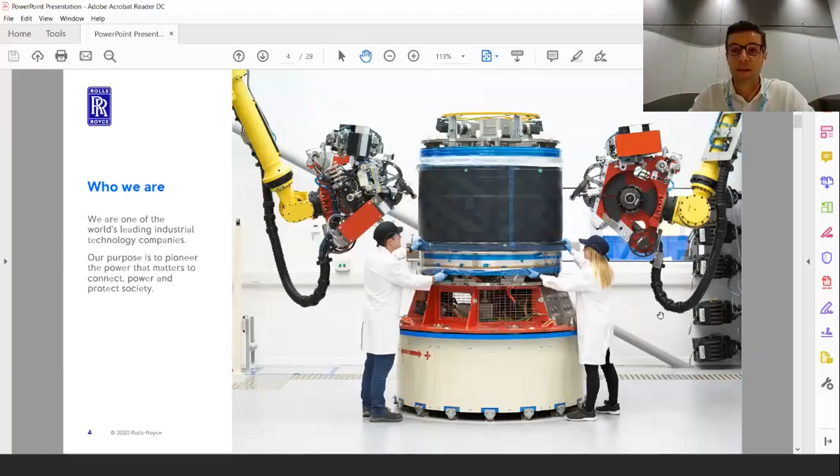That's not actually in Singapore, but you would have read in the news that we're also considering small modular reactor, and that's something that we're pushing quite hard now. So that's our transition to the power that matters to us, green power and sustainable power.

As I said, electrification is becoming very important. Quite a few programs are running. We've partnered also with a few other industries. We've also bought Siemens eAircraft.

It's very important for us that we transition towards sustainable power, potentially hydrogen flight. So we're also exploring fuel cells.

As it stands, the business is... most of our resources are still in civil.

That's probably the Rolls-Royce power systems that people know the most, so civil large engines. But we do have quite a lot of marine application in power systems, and I say marine because that's the biggest. But we also power trains.

We power quite a few things with traditional engines, reciprocating engines, as you see in the picture there, under the brand of MTU, which you might recognize. That's also part of Rolls-Royce.

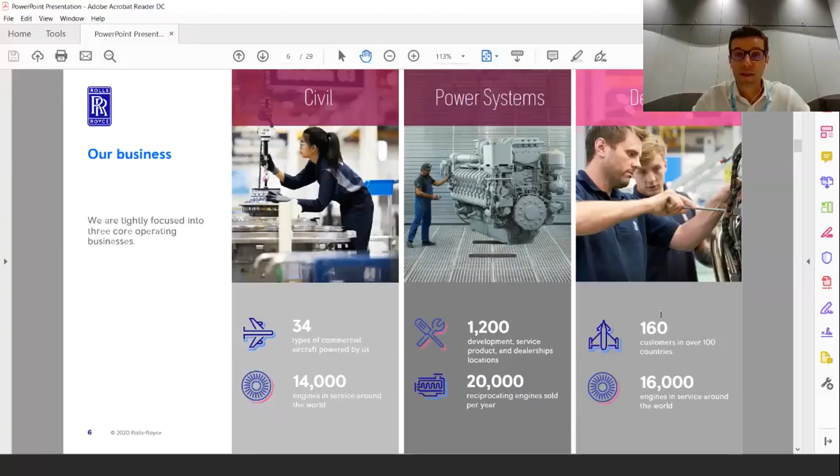Now I'll move to the manufacturing technologies. The challenge we have is that we need to be working on what we will do in the future, especially in my division. I'm the corporate lab director and chief of manufacturing. I'll take you through this presentation to explain what that means.

Early TRL level, technology readiness level, technologies are developed in our UTCs, University Technology Centers. I'm responsible for that in the Asia Pacific region. Then we use technology centers, which I'll touch on later, to mature that technology developed within universities into an environment close to a shop floor.

And then we push it into our plants, mainly in Singapore but also elsewhere. So the technologies we develop here can first be implemented in Singapore, but then also in Germany, the US, or Egypt.

So just as background, we are going a lot more into digital. That's something we've done historically - gathering data from our engines. We're actually very familiar with data analysis and trend monitoring, gathering data to be more informed of the situation. That's been going on in our operations center in Derby, UK, for a long time. Now we're trying to apply this to pretty much everything, including manufacturing.

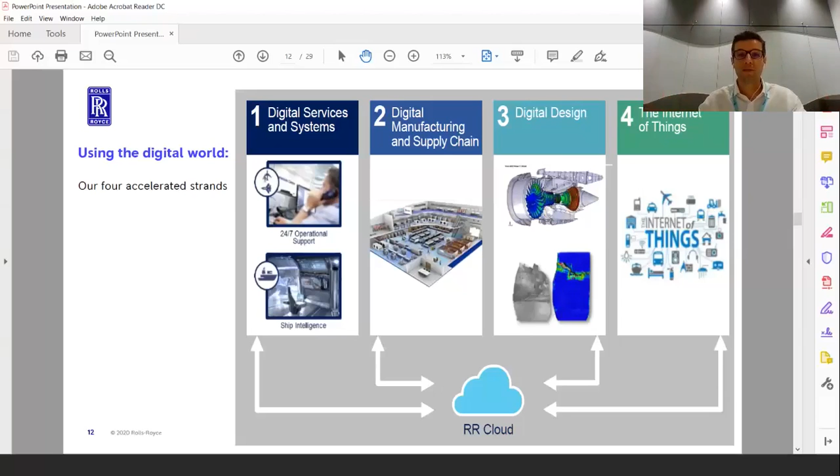So we've started to do that - IoT developments. We've got digital in service, which already exists, but now we've got most of our tools being tracked into the shop, and we've worked with SIA here in Singapore, for instance, on tooling. This is becoming very helpful because we can build that into the MRO planning.

So we know that we've got the tools available, we know the engines are there, we know all the C checks can be done properly when the aircraft comes in. That's what we've tried to do, taking advantage of the downturn, unfortunately, with the COVID impact. We tried to set up all these things in anger so that when the load comes back, we're a lot more established.

So we're trying to take advantage, to an extent, of the fact that the load went down to build in additional things or implement things that we were struggling to find time to do. So that's what we've been concentrating on - all these tags, the new apps to actually do the tracking. All this has been developed in the last few months.

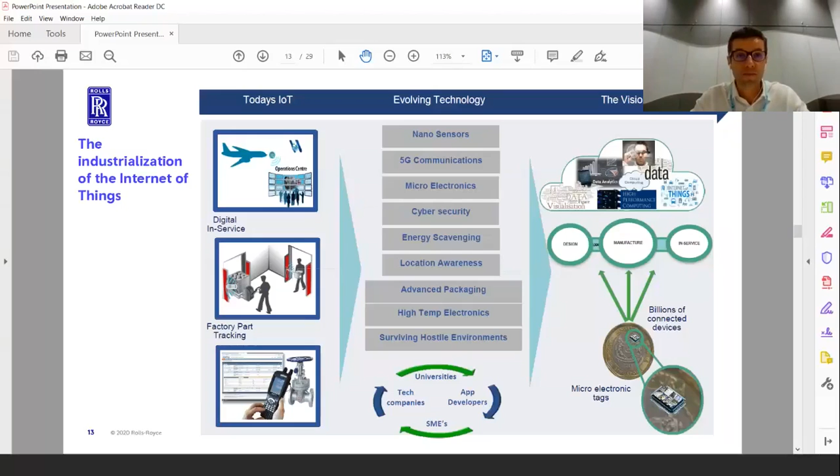So we've done that also on machines - that's an example of implementation. So in our fan blade manufacturing plant, we've now installed quite a few additional sensors, and we're able to stream in real time the key process variables, and very quickly we can see.

So now, because we've done that for a few months, we know what a good blade looks like, and we know exactly the pattern that the key process variable should follow instantly. That's what's quite encouraging actually - when something goes wrong, it goes wrong very quickly. It's actually very rare that the process starts very well and then goes off or goes wrong. It actually starts within minutes.

So as soon as we see - and there is quite a significant difference from what we've seen so far, which is also good - instantly you can stop the process and check what's going wrong, and obviously save your part and ensure that there is no non-conformance. So with that pilot, we're now implementing it onto our other machines.

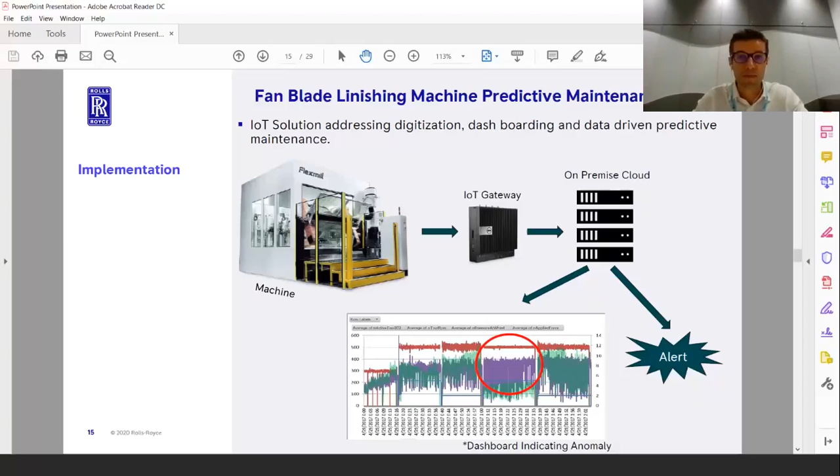Once you've downloaded the data, you need to use quite a bit of artificial intelligence, especially for inspection. So if you think about what I just mentioned, you've got your infrastructure in place, you collect the data, you will decide on your sampling rate, you will decide on the platform that you want to use, you will decide where you do your analysis.

Do you do it at the edge, which is close to the machine, or do you do it on the cloud? Obviously if you do it on the cloud, you benefit from quite a lot of apps or additional analytics power to an extent that you don't have to develop yourself. However, cybersecurity is a bit of a challenge, so you need to ensure that you can actually push all your data to the cloud without any risk. That's an assessment that every company needs to do.

Historically, Rolls-Royce is very conservative, but I can see that with how cybersecurity is evolving, we're actually now more confident that we can push more data to the cloud. So just a few examples there of the AI solutions that we've developed.

We can have a look at the microstructure to detect the alpha case in the fan blade, for instance, if there is any. We can correlate X-ray sentencing to a location later on in the process. So that's what's also very important - once you start to download all the data, you can actually correlate different process steps. So again, a lot more informed manufacturing.

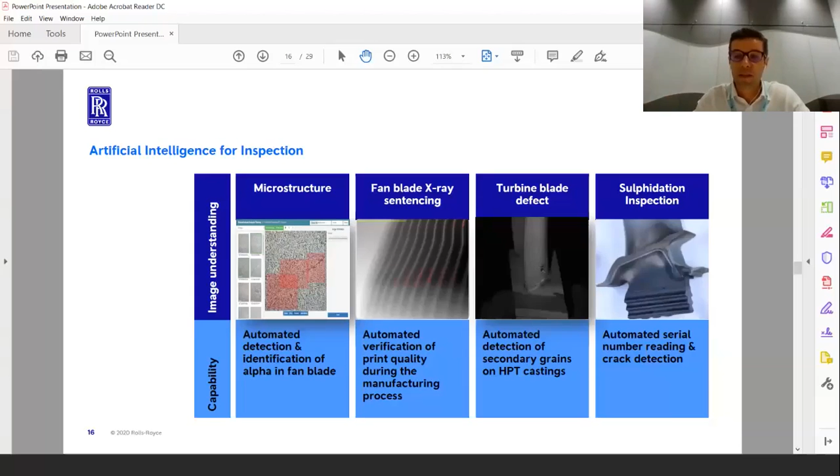And we can also do in-service inspections, so sulfidations, checking that there isn't any damage in the blade. So that's for our MRO shop before we actually fit it back on the engine. We can also use that for in-service support.

So we can monitor the SFC, the fuel efficiency of our engine in service. We can predict, or we can do in-service analysis. If there is any LRU, line replaceable unit, that should be replaced, we can also do that based on the data. Any compressor blade issue, for instance, we can also determine based on the image analysis whether we can go for an additional set of cycles or not.

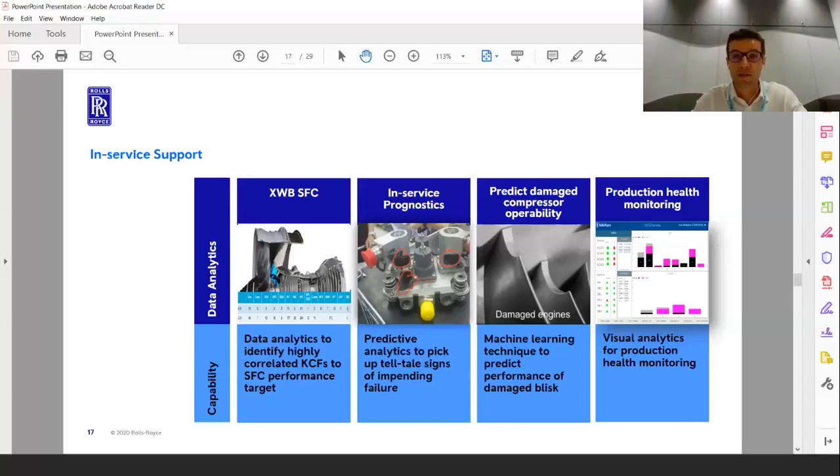So all this is very important, but you do need to ensure that you've got the capability to download your data and you've got the right infrastructure. So to do that, we've actually used a public-private partnership in Singapore.

It's a collaborative approach with our research center. What we need to realize is that the chart I've presented on the architecture - you've got your gateway, and then from the gateway you go to the cloud. Sounds very easy, very straightforward. It's actually quite complex. You've got greenfield machines or brownfield machines.

The new machines are enabled with communication protocols that make it a lot easier. But you can't have only new machines. In fact, most of our plants are a few years old, at least. So we need to be able to connect all these machines as well.

Some solutions, you think, well, I'll just go with one brand, for instance, and that should make it easier. That's not true either. Systems with the same brand on them - we've had instances where it doesn't connect effectively. So a lot of people will be selling that Industry 4.0 solution saying it's already been done.

I think it's still pretty challenging for quite a few people, and therefore we have to try things. My belief is that you have to do pilots. You have to test things in a real shop floor environment. However, you cannot do that if you have to disturb your production setup.

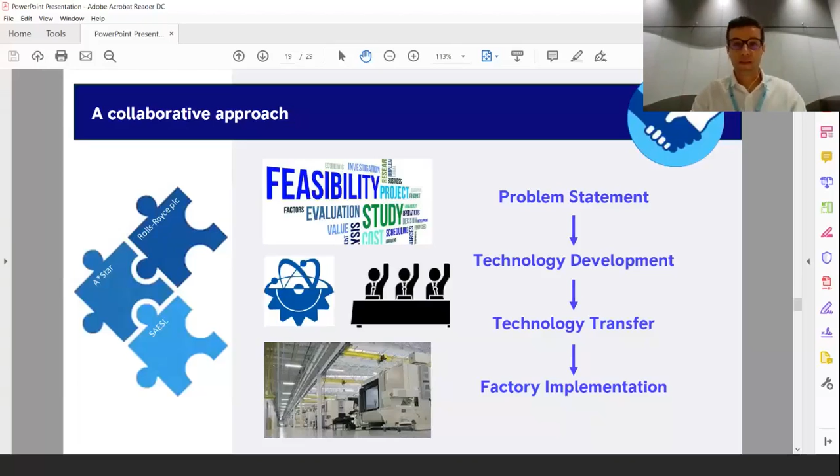Once it reaches a sort of lab level, that's TRL3. On a representative component, still in a lab, that's TRL4. Once we get to that point, then we push it into our research centers - in this instance, that's where I'm calling from actually today, the A-STAR Research Center. That's where we test all the solutions in representative shop floors. We debug basically everything, ensure that it can be sustainable.

And then we push the solutions into our facilities as soon as it goes into 7 onwards. So 5 and 6 is pre-production, you could say, and then 7 onwards is actually in production.

So a few last words on the lab. We've got a lot of researchers, as I said, more than 100. That's the phase of the corporate lab that we're running. We've developed significant technologies, and some of the IoT solutions presented - self-powered sensors and all these sort of things - all this has been developed in NTU.

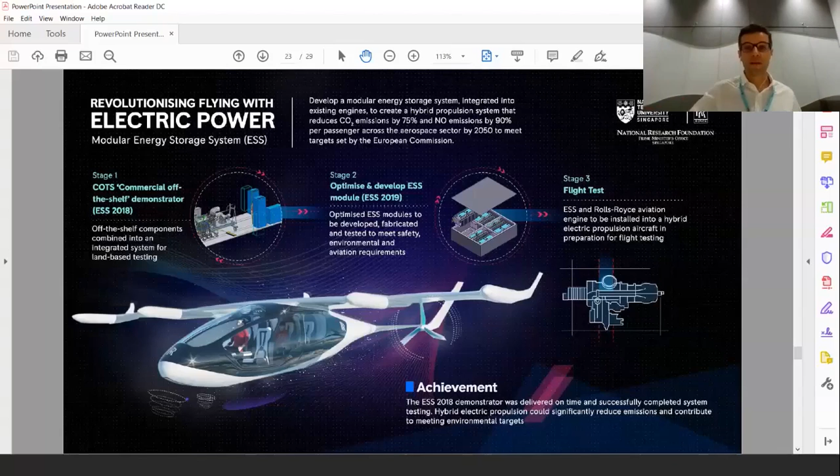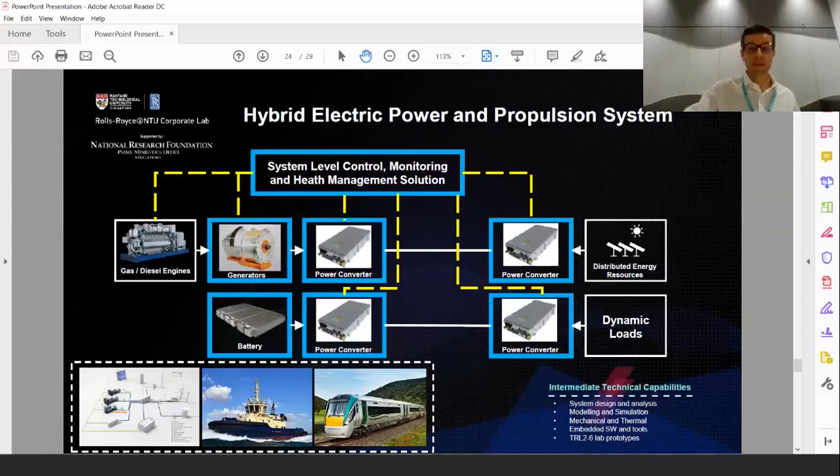So when you've developed the fundamentals of the technology, we then push it into our advanced remanufacturing centers. Now it's a lot more industrial - we've got robots, 5-axis machines, 3D inspection. This was for a cleaning solution for a drum, you can see here a compressor drum. So we push those programs forward.

We test them and make sure we've got all the repeatability we need. We can download the data, so we can look at all the connectivity, shop floor connectivity, and everything we need, and then we push it into our shop.

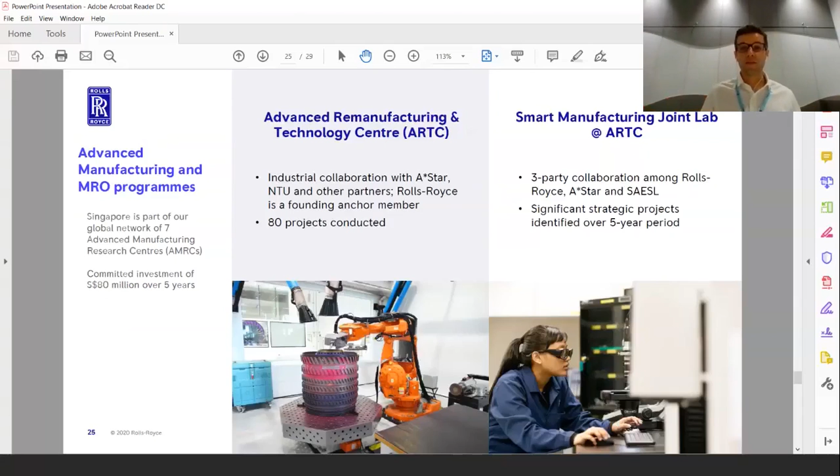Really, putting the money together, Rolls-Royce and A-Star actually generate an ecosystem which is extremely powerful. It gives options and capabilities to develop new technologies, finding little gems in those suppliers with interesting solutions for us.

And that's really been enabled by this program. Tomorrow we're also working with the Singapore government on an event called Slingshot, a startup event where we mentor the startups, and they go to a final where there will be some support from the government for them to engage on a project with us or with other industrials. So developing this ecosystem is very important, because that's how you encourage and spark innovation and come up with new solutions.

The technology acquisition through these partnerships has been well recognized, and that's an example of an article this year, where we show how we've used two of these SMEs to develop significant systems, and the MDs are the guys on the right-hand side.

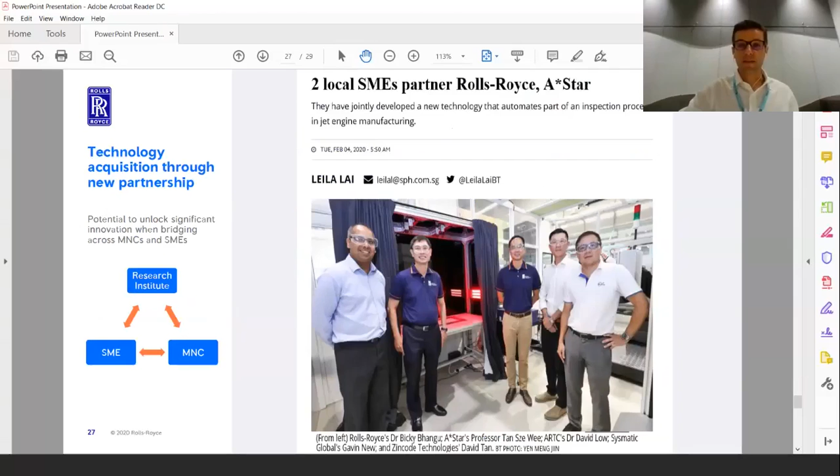I'm conscious of time, I'll push just to show a few implementations and finish on that. The key has been to push all those solutions this year into the shop, to try and take advantage of our facility. So from left to right, you can see new inspection systems.

We're also coming up with a printing solution. A lot of stuff that used to be manual - the two images on the left-hand side, that's now fully automated. We've removed the manual intervention, but our engineers or shop floor personnel are now involved in other things that are more value added.

So we've tried to remove the variability and the mundane activities, automating them and ensuring our guys are concentrating on more value adding activities. On the right-hand side there was also a masking activity, just before putting the blade in the etchant, and that was also an HSE concern. So automation gives you the option to also deal with this sort of thing.

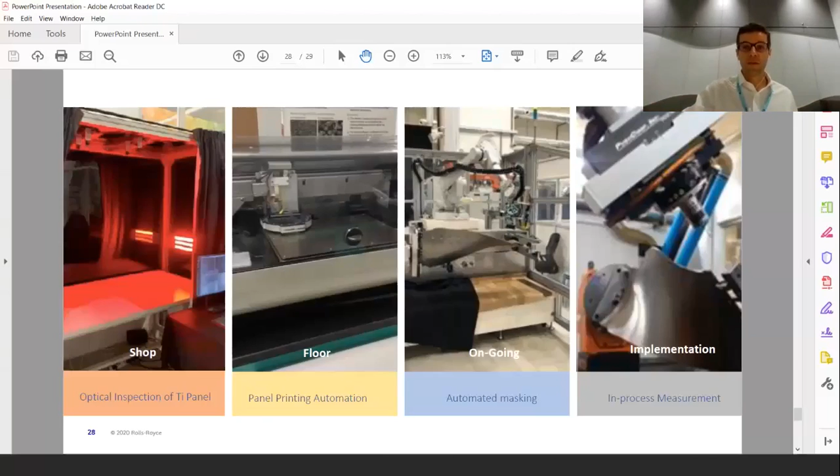In that sense, I hope this was useful and interesting. If there are any questions, I can answer them.

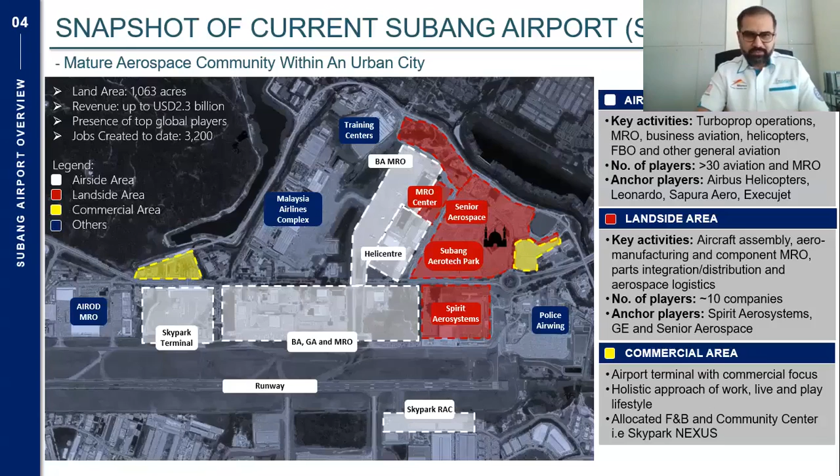The future vision as we move towards our development of Subang Airport is really what we say when we talk about the winds of change. It is really about taking a piece of old infrastructure and regenerating it, making it fit for purpose for business aviation as well as the aerospace ecosystem. We intend to build on what we have today, expand on that, and also improve not just look and feel, but also what we provide to the ecosystem, in terms of making it a safe, reliable infrastructure, green infrastructure.

We understand that with the fourth industrial revolution coming, there's a need for high-speed broadband networks and all that, and these are being planned and rolled out as part of the Subang Airport regeneration program.

With this, we expect to bring to fore over 2 million square feet of additional nettable area on the air side, which is typically premium and of high demand. What we see today across a lot of airports is basically a constraint in available nettable airside infrastructure facilities to be leased out by MRO players and the likes.

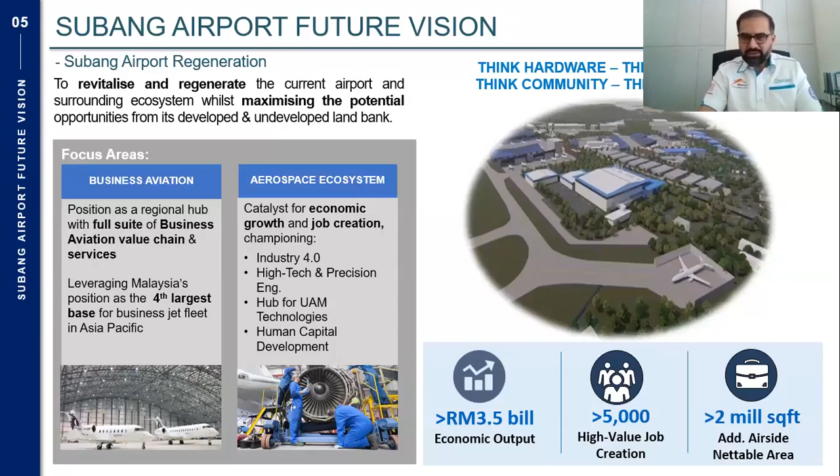A snapshot of what we see as the ultimate goal of Subang Airport regeneration within the next 10 to 15 years.

First, Subang Aerotech Park is already in the development stage. In fact, it has concluded its infrastructure development, and right now we are ready to go to market, ready to undertake build-to-suit facilities for tenants. We already have one launch tenant, Senior Aerospace. In this Aerotech Park we would see over 2.6 million square feet of infra-ready landside real estate. I emphasize this is already ready infrastructure - it is already going to market. Hence why this is today.

Similarly, in the next 12 to 18 months, we are already in advanced talks to develop about 350,000 square feet of a large-scale hangar and facility for a business aviation OEM-owned MRO. That would position Subang for the first time ever as an MRO for business aviation also anchored by OEMs. We see that in Seletar, but we have yet to see that in Subang, and this would make the change for the first time. I think that provides the right signal to the market.

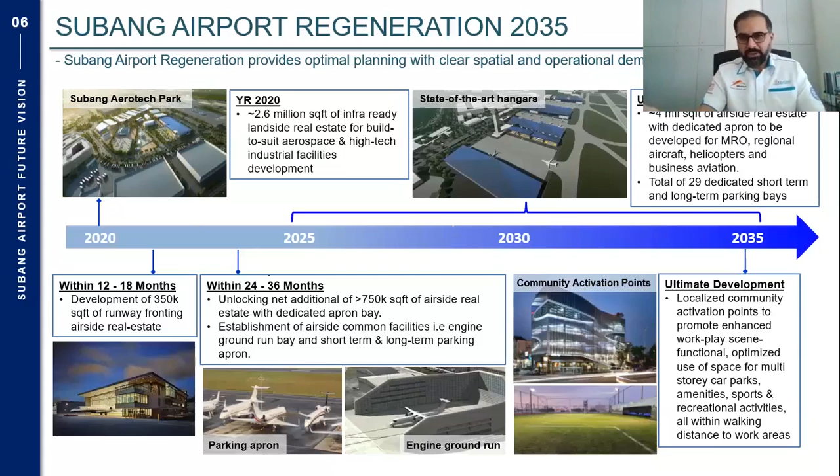So ultimately, by the end of the 2030s, we would see 4 million square feet of prime real estate with dedicated apron on the air side for MROs, regional aircraft, helicopters, as well as business aviation, and a total of 29 dedicated short-term and long-term aircraft parking bays, largely fitted for the business aviation market.

So, in short, why Subang Airport? As I mentioned earlier, it's the most mature ecosystem within Malaysia. It's established with established infrastructure only to be made better. There's a conducive aviation ecosystem recognized in terms of authority standards. We have got competitive charges as well as a cost profile.

We are also well connected within the ASEAN region. We have got the readiness in terms of human capital and access to skilled workforce. There are over 53 aviation education training providers surrounding Subang, as well as a few right in Subang itself. There's modern infrastructure, as well as the necessary incentives and facilitation, given that the Malaysian government, regardless of which government is in place, has shown a consistent focus on aerospace across all the governments that's coming.

Thank you, Renu. Let me share my slide. Do you see my slide? Yes, sir, we can see you. Oh, great. Okay.

BP Aerotech is the joint venture between Boustead Projects and also Malaysia Airport, and you can consider us as the joint developer of this aerospace park, Subang Aerotech Park, right?

A moment, the slides are not flipping. Yeah, there you go. Right.

I think Renhill did a very good introduction of Subang Aerotech Park. So I'll just briefly mention this slide, unless you have any questions, you can ask us later. Subang was the international airport for KL in the 80s and the 90s, right?

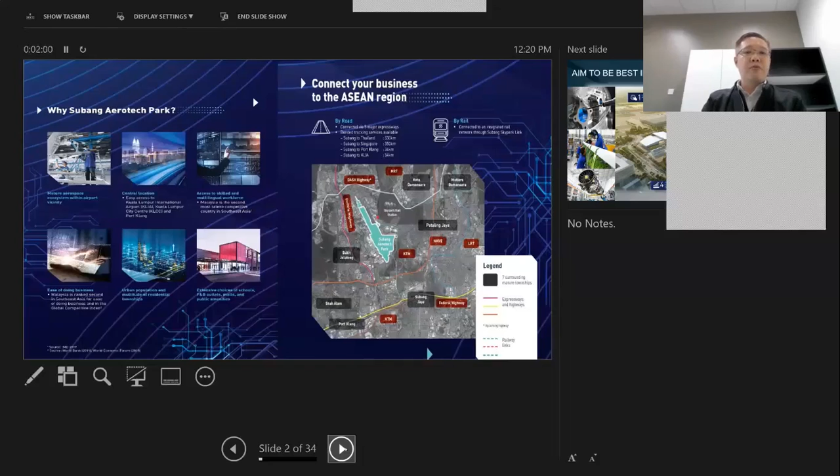It's centrally located. If you look at the location itself, it's near all the major townships. You can see Shah Alam, it's right next to Shah Alam, and it's near all the major highways connecting to Port Klang and so on. So being located at the Subang Aerotech Park, in terms of connectivity is not an issue, and in terms of hiring of employees, certainly is not an issue either. So we would like to capitalize on that to actually promote the Malaysia aerospace market.

This will dovetail the Subang plans that Renhill has just presented. A few items that BP brings to the table, which may be of interest to SMEs and also the larger companies. Subang Aerotech, other than being centrally located, has access to the joint venture partners' resources. From Boustead Projects, we provide real estate solutions, right to facility management end to end, everything from design and planning to digital modeling to construction and construction management.

And if the clients are sophisticated enough, we can even do a digital twin, smart user experience, asset management, facility management, and asset enhancement. As the facility grows, we can assist the end users in the entire process.

And obviously from MAHB's angle, they are the airport operators. We are always at the forefront to undertake the feedback of the end users, how we can actually improve the end user experience, how we can help assist the end user improve their businesses. We take all those feedback as and when we develop the master plan and future master plans of the city airport, right?

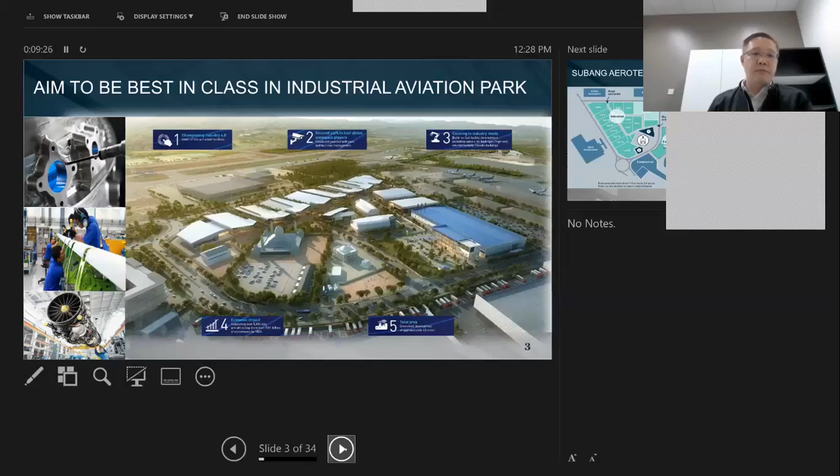So in the next few slides, I'll show you some locations. If you can see my pointer over here. Okay, so this is the Subang Aerotech Park.

These are some of the built-to-suit facilities we have, about 34 acres. This is Senior Aerospace, which is the very first tenant in the Subang Aerotech Park. The remaining facilities can build up to about 1.1 million square feet, and obviously over here is the industrial area.

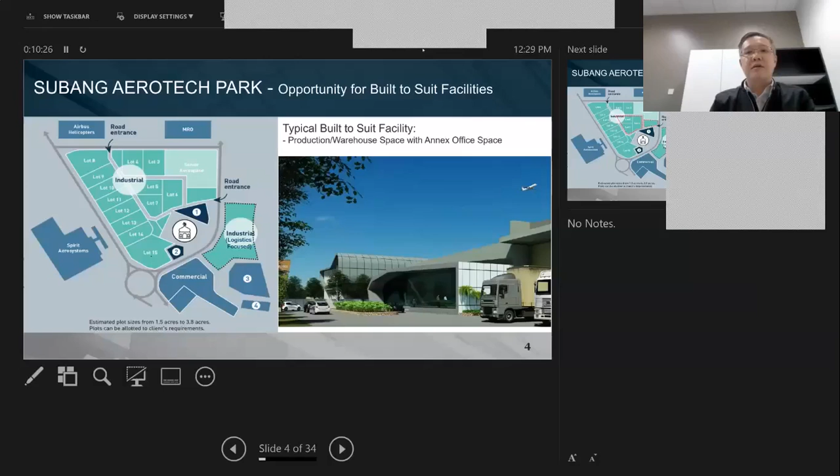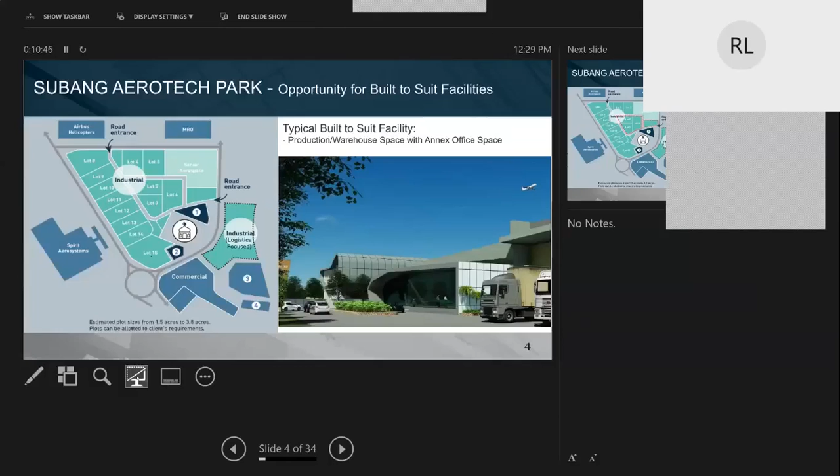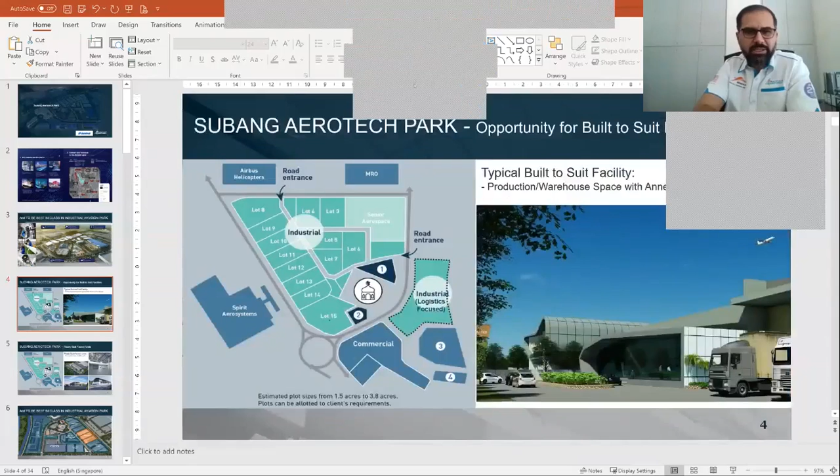Sorry, Raymond, perhaps your screen isn't in full screen mode. Oh yeah, are you seeing the presenter mode? Yes, I'm so sorry, I thought you were looking at the full screen mode. Why don't I exit the presenter mode? I think the picture should be bigger. I think this is probably a bit bigger. I don't know why it's not showing full screen. Are you seeing this now? Yes, I see this, it's not full screen but it is bigger than before. Okay, great, I apologize for that. I thought you were looking at the full screen and I was looking at the presenter mode.

Okay, so if you look at this, this is the Aerotech Park, and this is earmarked for logistics. So you have about 400,000 square feet of logistics facilities here, that's possible. I'll just move on to the next slide.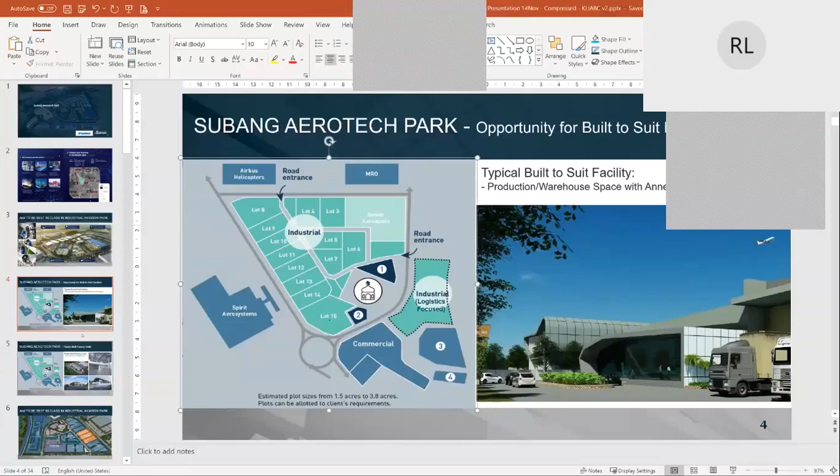Okay, so these are some of the ready-built factories that we have ready. Each of them is about 500 meters square, which can actually accommodate smaller companies that can come here if they want to do some sort of MRO or light manufacturing. They can certainly undertake some of these facilities, and thereafter they can expand when their business grows into larger build-to-suit facilities.

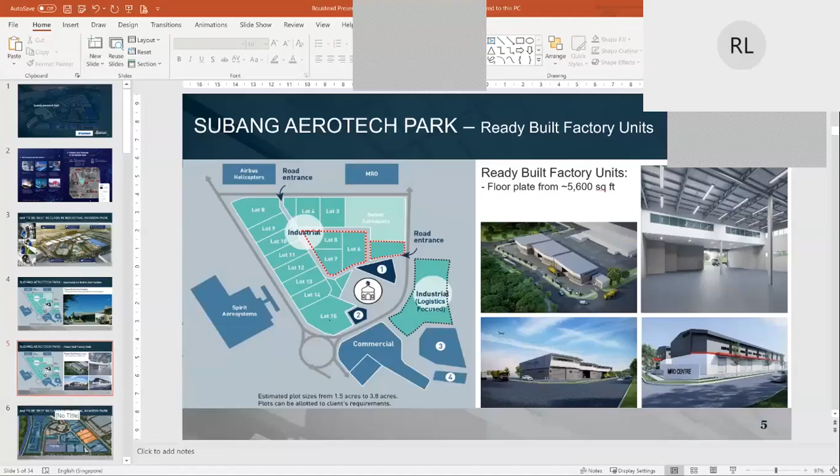And if I were to change the view slightly, so over here are the ready-built factories. We expect to have about 3 build-to-suit facilities. There's already a potential build-to-suit client here and the future BTS over here, and here is the future aviation logistics.

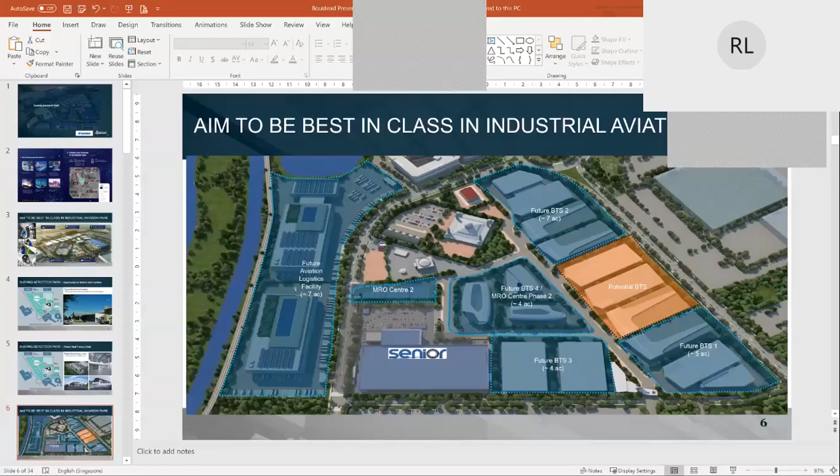So as a development partnership, we are pretty flexible. Some tenants will say, look, I do not want to own the facility, I just want to pay a rental. The BP Aerotech joint venture will actually custom build the entire facility for the client and sign a long-term lease, whether it's 10, 15, or 20 years. We're pretty flexible.

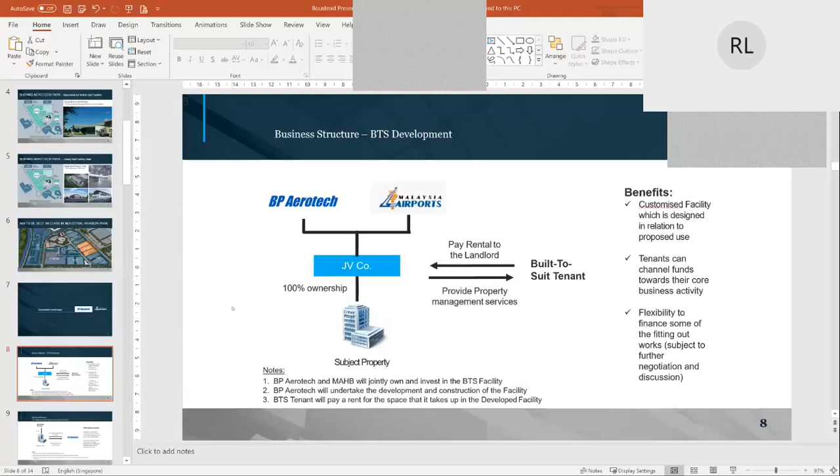Alternatively, if an end user comes in and says, eventually I would like to have ownership of the facility, that's not an issue either. We are able to provide certain options to purchase at a certain point in time, whether 5 or 10 years down the road. These are some of the options, and we're also open — if the end user says I'd like some exposure to the real estate but do not want all my capital locked in, we are flexible in that respect as well.

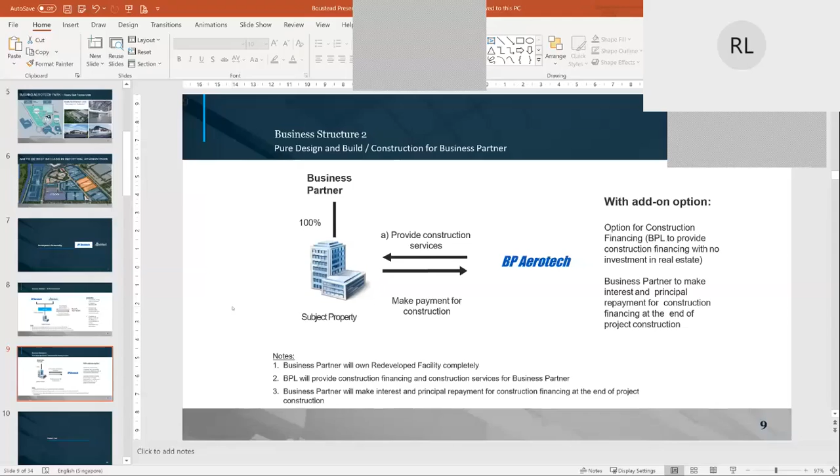All right, yeah, so that kind of ends my presentation.

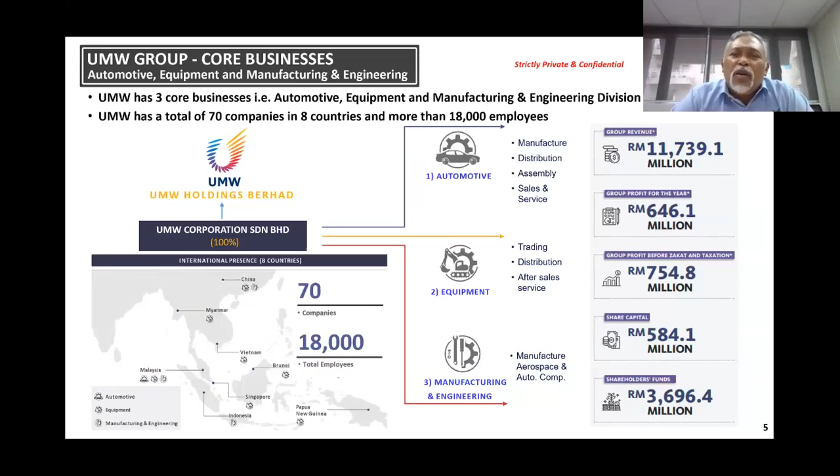The first division is actually the automotive division, the most famous one. Other than Toyota, some people know that Perodua, the second national car, is also part of UMW. We are the major shareholder, as well as Lexus.

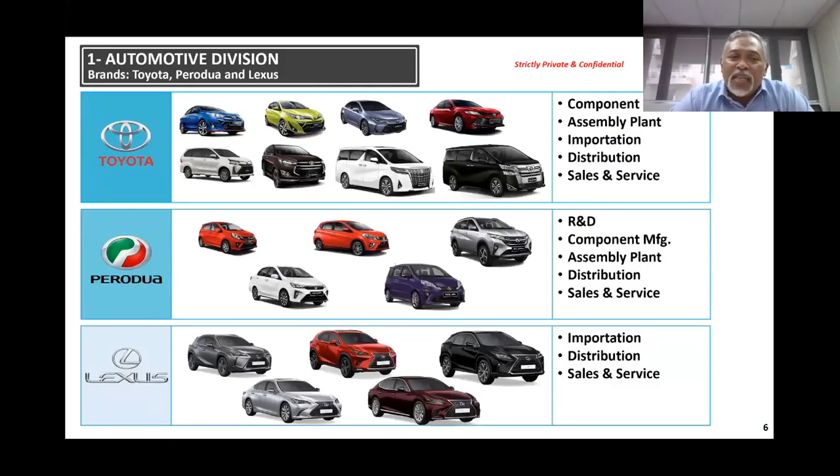The second core business is the equipment division. We are, for example, the distributor for Toyota Material Handling in Malaysia, and also Komatsu Limited. So our relationship with the Japanese OEMs is pretty strong, and it goes all the way to the United States.

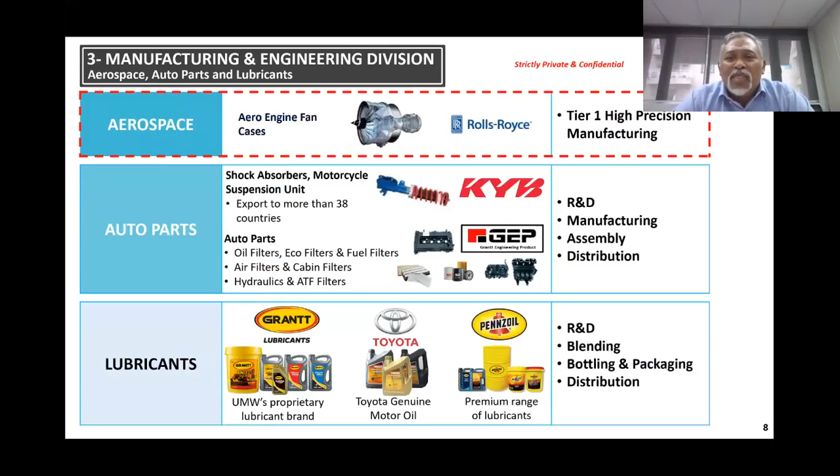Manufacturing and engineering has 3 major businesses. One of them is lubricants, and also part of this business has been with us for like 40 years. And now we're adding aerospace as one of our businesses in manufacturing engineering. We'll tell you later when we started - it changed in 2015 when we signed the contract with aerospace.

Manufacturing has been with UMW for a long time. We started in 1968 when we began the production of Toyota cars in Malaysia. Over the years we grew the business - in the 70s as an assembler, in the 80s we had a proper JV with Toyota, and in the 1990s we invested into Perodua, starting in 1994 with the plant and operations.

Then in 2000 and 2010 we started the distribution of Lexus, and in 2019 the new Toyota assembly plant in Bukit Raja started operation. So our experience in manufacturing is not just the assembly of cars, but also components. In total we have about 11 manufacturing companies in UMW.

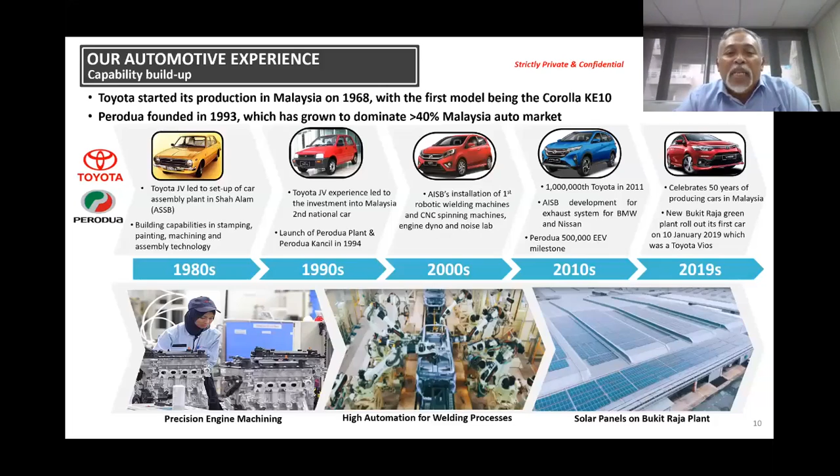Moving into aerospace, from automotive to aerospace - obviously the first reason is that this is in line with the mission to become the number 1 aerospace nation. This is a promoted industry and not far off from what we have done before. Of course the products are different, but the manufacturing is similar. So we started in aero manufacturing as our first foray into the space. Also, the opportunity came along to become one of the tier 1 suppliers for Rolls-Royce engine manufacturing.

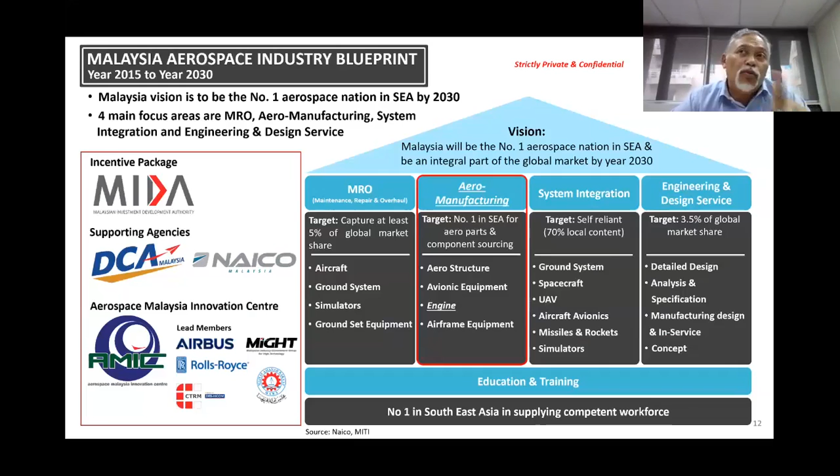Aerospace is also an entry point for HVM - HVM stands for high value manufacturing. So our foray into aerospace was not the only industry we wanted to come into. We're also looking at high value manufacturing as our angle. So from aerospace, we're looking at industrial automation, advanced healthcare, the energy sector, and beyond. This is a step change in engineering capabilities.

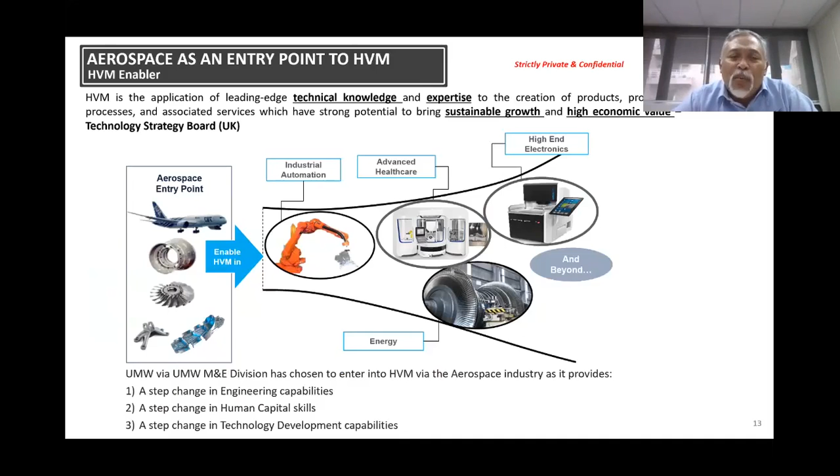As I said before, we have always been in manufacturing. So this is a step where, instead of assembly services or mass production, we move into specialty making, where there's even a step change in human capital and engineering capabilities.

This HVM Park is launched in 3 phases. The site is about 900 acres. We are now in phase 1, with 3 phases over 10 years. Phase 1's standard was actually aerospace - we have fulfilled about half of phase 1 already, and in 2 years' time we will achieve the second phase. You can see from the picture that the corridor was just south of the aerospace section, on the right side of the picture.

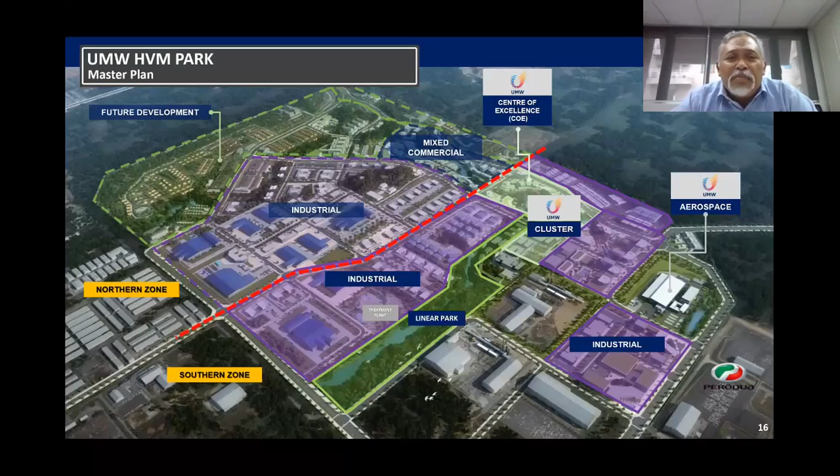The key concept and features of the HVM Park - this is a managed industrial park with multi-tiered security. Environmental design is big in the park. So we're looking at green solutions like solar, wind, water harvesting, and we're also looking at reclaimed water, not just for green purposes but also as a possible cost reduction for park tenants.

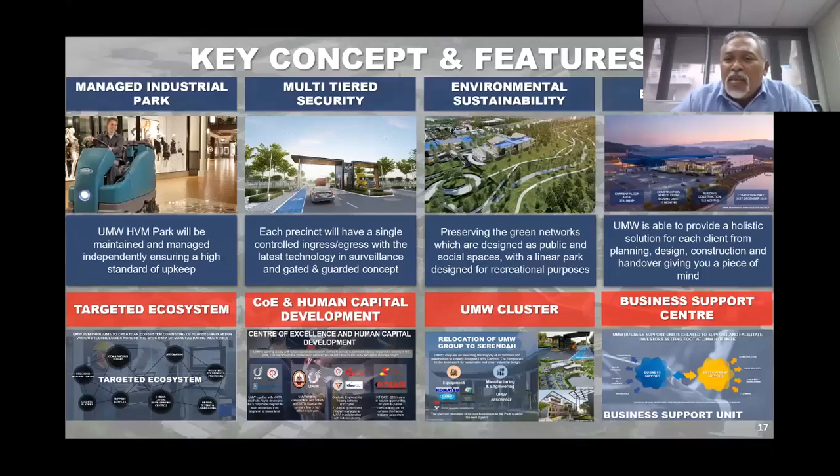Other than new tenants, we are moving our UMW cluster from Shah Alam to Serendah, and there will be a business support center established for the park.

For UMW Aerospace, it's a pretty fast project for us. Of course, this is our first foray into aerospace. We got a lot of help from Rolls-Royce and also from the local government and the federal government. We signed a contract in August 2015.

We started recruiting immediately after the signing in November 2015 and completed the capability development center. We cannot send our people to the UK due to some union issues, so we bring the UK to us, so to speak. The capability development center was completed in July 2016, and the main facility completed in December 2016. So this is a pretty fast project.

We started installation of major equipment for phase 1 in 2017. By April, we were ready for manufacturing. Of course, the certification will take another 7 to 8 months. We had our first delivery, our first article, to Singapore in November 2017. So from signing of the contract to delivering the first unit took 27 months.

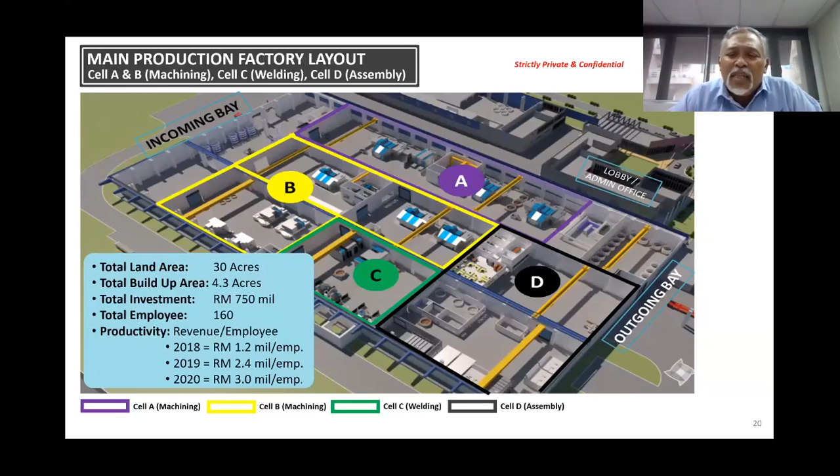If you look at the capabilities developed, obviously titanium machining, and very large titanium machining, not a small one. These are complex assemblies, and the factory has achieved aerospace certifications like AS 9100 and NADCAP.

We also have 22 aerospace training programs developed for this facility, for this project.

The factory is installed with Industry 4.0 technologies - MES, PLM, ERPs. Generally, these are paperless.

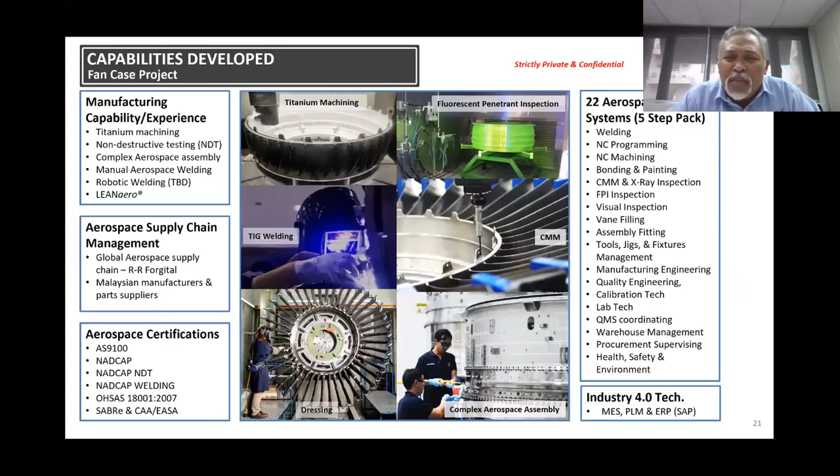We got some recognition from Rolls-Royce. Obviously, this is one of their fastest projects from signed contract to delivery. In 2018, we were the winner of the Trusted to Deliver Excellence Award by Rolls-Royce.

I think that's the end of my presentation. Please, if you have any questions.

Thank you, Mr. Saw. That was a really interesting presentation, very insightful - how an automotive player moved from automotive to aerospace. One question I'd like to ask is, you've had great success not only in entering the aerospace value chain, but also in forging the relationship with none other than Rolls-Royce. How did this journey begin, and how did you finally achieve that? And what was the biggest hurdle in entering the value chain of aerospace? Was it training, certification, safety protocols, audits, employee culture? There are many barriers to the aerospace industry when other industry participants want to enter it. So what was that, and how did you resolve it in the case of UMW?

Our engagement with Rolls-Royce started in 2014 when we were looking at suppliers. In the beginning, we weren't looking into Fan Case, we were actually looking at something else. But as we went along, the aerospace Fan Case opportunity came up, and we thought that was a good one because becoming a Tier 1 was actually a pretty good opportunity.

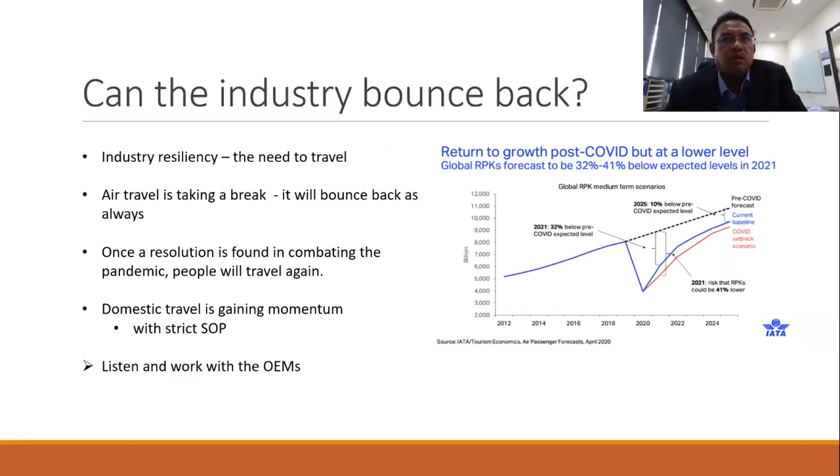So what we have to do for the industry, first, definitely we have to listen and we have to work with the OEMs, because they are the ones that's going to be driving the industry's requirement. So for Malaysia, what do we have?

One of the major milestones for the aerospace industry for the last maybe 2-3 years was that aerospace industry has been identified as one of the industrial pillars for RMK12, the Malaysian 12th Plan. It's supposed to be 2020 to 2025, a 5-year plan. It has been identified as one of the 5 industrial pillars. So with that, the government is giving the industry priorities in terms of funding and also resources. That's even prior to COVID.

So we know we still will have to work with the government in terms of trying to find the best solution and the best way forward to harness the government support and also the things that we can do together.

So what we need to do right now is start reviewing the targets that we have in the Malaysian Aerospace Blueprint. I'm sure it has taken a hit, but we hope that we can get back to the same targets within the next 1 or 2 years.

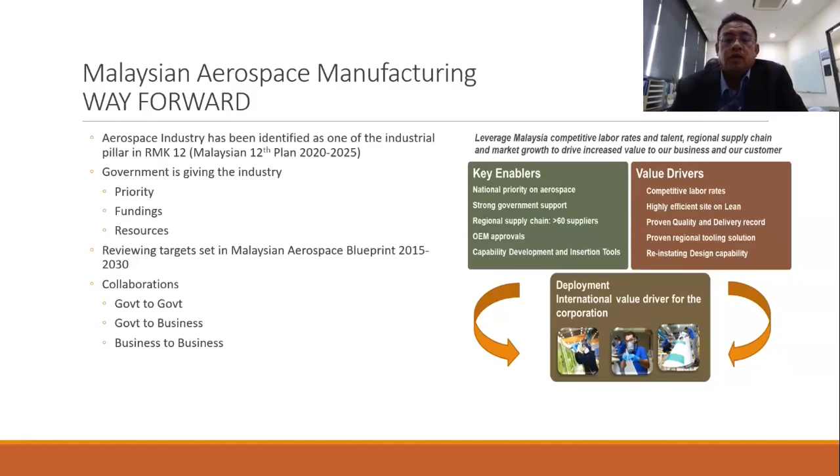So again, this is just a summary of what we've talked about. We've talked about government-to-government aerospace relationships, and that's where we will try to lobby for work, lobby for collaborations, and lobby for technology. So what we have to develop is a stronger ecosystem in Malaysia, and we have to work on our industrial strategy blueprint. We have to make that work.

We do have to look at the threats around in terms of our competitiveness, our ability to contribute technology, and our products themselves. We have to be good. At the end of the day, the target or the objective is to be involved in the next future aircraft, because that's the future. We have to be part of that.

I think this is my last slide. So how do we strengthen our position in the industry?

What the OEMs are looking for is, of course, competitive pricing. So as an industry in Malaysia, we have to improve our efficiency and start reducing wastages. That means we can offer the OEMs competitive pricing. At the end of the day, profitability is the main objective for all businesses, so we have to be competitive, and also make sure we make the profits.

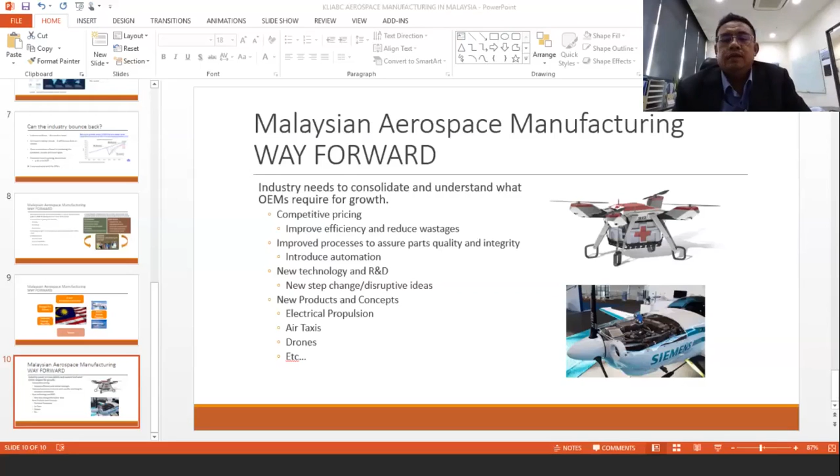We do have the capacity, we do have the resources, and we do have the government support to do this. So we need to be able to harness all of that, consolidate, and move forward. And that's my presentation.

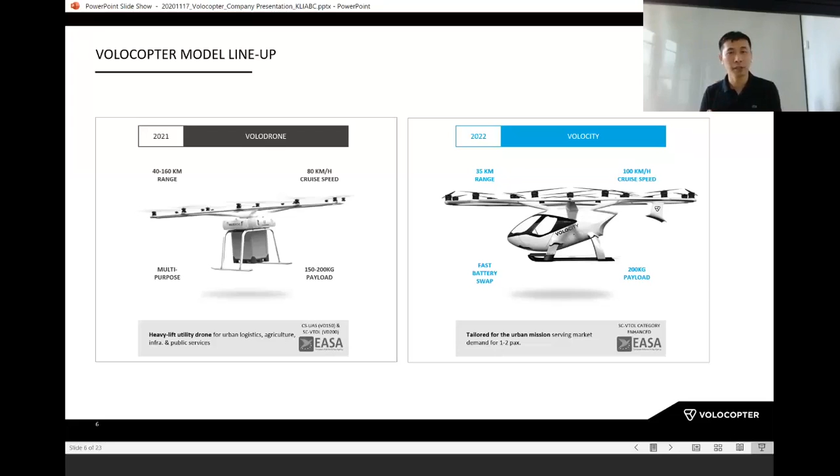Speaking with local partners in this region, we have identified substantial interest when it comes to logistic use cases for ship-to-shore deliveries, for the mining industry, and for transporting cargoes to offshore islands. But the Volo Drone will also be used to transport containers of goods in an urban environment. Now, looking at the Volo City, this is an aircraft that, in our opinion, has it all, the highest safety standards in aviation, for instance.

We will be certified to the highest possible standards, just the same as the commercial planes that you fly in today, your Boeing 737s and Airbus A320s. We have best-in-class noise signature, which is extremely important when you're flying above an urban environment. We also believe we have the perfect design for the urban mission.

Vertical takeoff and landing is extremely efficient, and the battery swap minimizes the ground handling time. We have a seating capacity of 2, so either 2 passengers or 1 passenger plus 1 pilot. In the beginning we'll be starting operations with 1 pilot on board, and we'll phase the pilots out over time and go into auto flight.

The aircraft addresses 80% of the demand for routes within a city, and it's an affordable and profitable aircraft. We can achieve profitability at premium taxi prices with current technology. So this is not a dream, it's not a concept, it's what we're going after, a real opportunity to build a profitable and sustainable business that we believe citizens can benefit from.

We're very proud also to be the first eVTOL startup in history to receive a Design Organization Approval, DOA, by EASA. EASA is the Civil Aviation Authority for the European Union, equivalent to the Civil Aviation Authority of Malaysia, CAAM. To us this meant a lot, as it underlined how we have grown from a small company to an organization that is now deemed worthy of having a DOA approved by EASA.

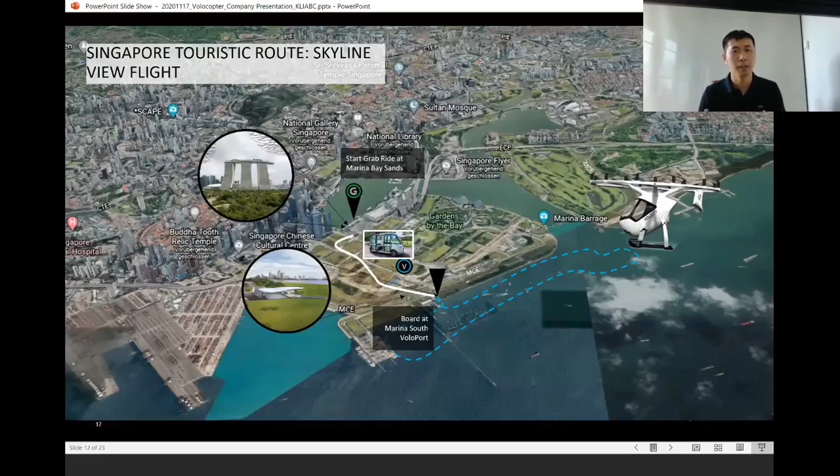Now, while we'll start with this touristic flight around the marina in Singapore, we want to expand our services to more routes, as you can see on this slide, and not just domestically, but also cross-border, for example into Malaysia. From the voloport in Marina South, we can operate a flight to Johor Bahru, which is well within the 35-kilometer range of our aircraft.

This would also facilitate tourists or business travelers who value that time savings between Singapore and Malaysia. Furthermore, this route is usually very congested before COVID at the checkpoints on both sides during peak hours and sometimes on weekends. So with the Volocity, we can help reduce the time spent in congestion, alleviating some of the problems of cross-border traffic.

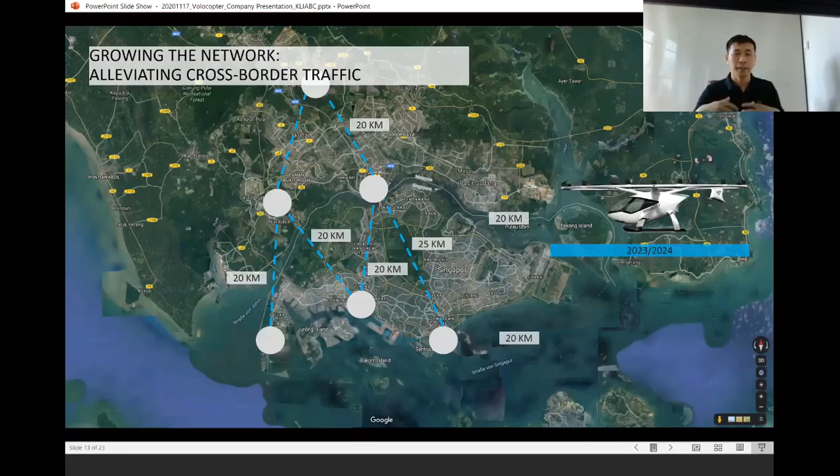We'll then further expand in a city using a city hub. Let me explain how we would do that in an example for Kuala Lumpur. In KL, we would look at first connecting the Kuala Lumpur International Airport in the south with KL City Center. Within the KL City Center, we can then add potential tourist routes, which allow tourists to escape the congestion of KLCC to discover KL from above, as we believe this will be a special and memorable way for tourists to see the city from an aerial view.

There are so many possibilities to explore Malaysia, and we believe that UAM is ready to take off, starting with the tourist route and expanding to different routes for commuters to use regularly. The tourist route in particular will contribute to the country's tourism GDP in Malaysia, as it offers an alternative way for tourists and Malaysians to view the city from above.

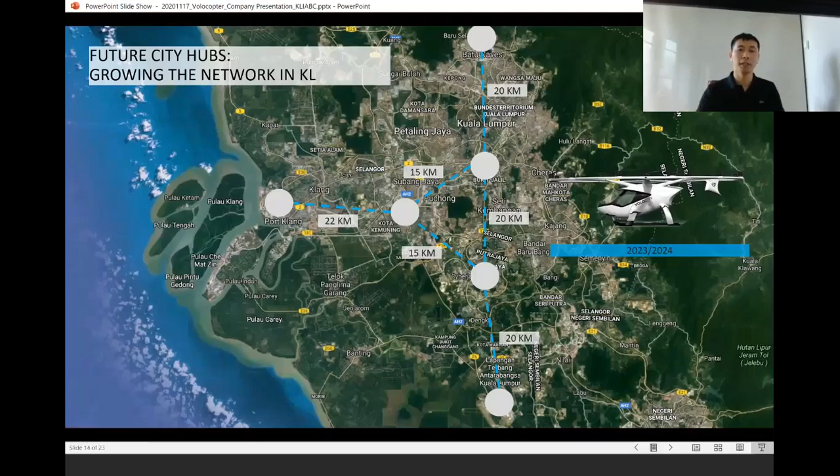Let me go a little deeper into these touristic routes. An example of how we can integrate UAM into the tourism scene is by using the Volocity to bring tourists to, for example, the famous Batu Caves from the KL City Center. On the way from KL to the Batu Caves, they will be able to enjoy sights that one would not be able to see from just driving.

We can arrange pickup services from the passenger's hotel to offer a holistic package that includes, for example, yoga sessions at Batu Caves, where one can escape the hustle and bustle of KL into this retreat. We want to create an experience that really highlights what Malaysia can offer.

Now, coming back to the broader picture, I'll quickly mention that we offer the possibility to reserve tickets for the first air taxi flights as soon as they happen, as early as 2022 and 2023. There were a few reasons why we did this. First, a lot of people kept asking us when they'll be able to pre-book flights, because they wanted to make sure they were part of the first people to experience this. It's also a way for us to show our commitment and confidence in our timeline to launch this in the next 3 years. At this time, I'm happy to report that the reservations sold out after a week and a half, and we were very encouraged by this strong show of public demand.

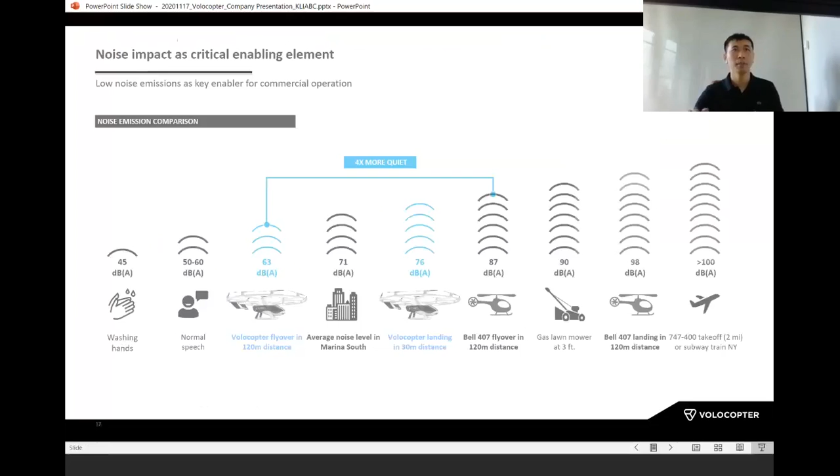Now, let me discuss some of the non-technical aspects of launching UAM. For example, noise. When we talk to authorities and partners, we often get asked how loud it's going to be, because noise is a major issue when you're launching an urban air mobility option flying directly over a city. We usually reply that Volocopter is not that loud. But what does that really mean? Well, in numbers, that's 63 decibels at 120-meter distance, which is the lowest altitude this aircraft will probably fly during cruise altitude.

This is, to be clear, below the average noise level of many Asian cities, including Kuala Lumpur. A study done by Malaysian universities found that traffic noise in KL is generally between 75 to 85 decibels. So when you're in KL, this aircraft will be below that background noise level at 120-meter distance. And of course, compared to traditional helicopters like the Bell 407 you see there, it's at significantly lower noise.

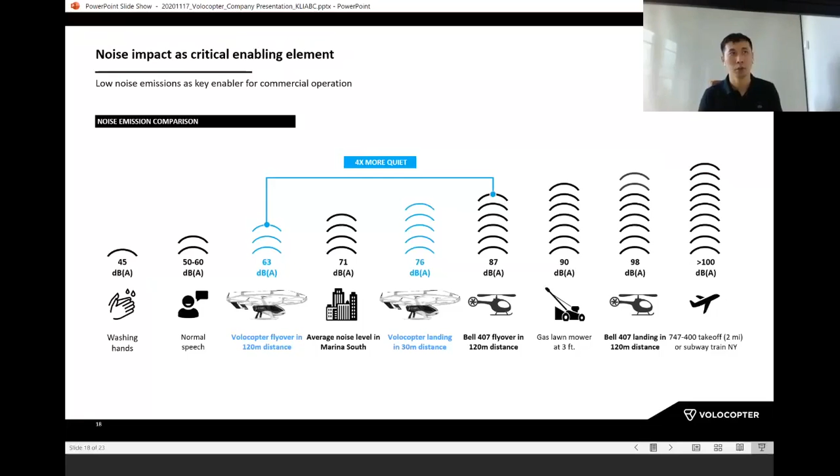Of course, noise is one of the critical factors in gaining public acceptance of UAM, which is another key factor in order for this industry to really take off.

This is extremely encouraging, and we will need to build upon this great work in order to make air taxis a reality here in Southeast Asia.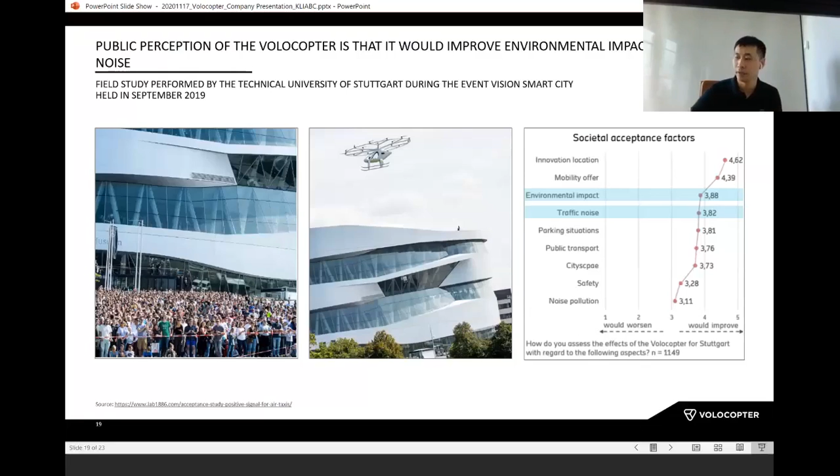And that's why it's more important than ever for us to grow the urban air mobility ecosystem right here in Southeast Asia in order for it to take off.

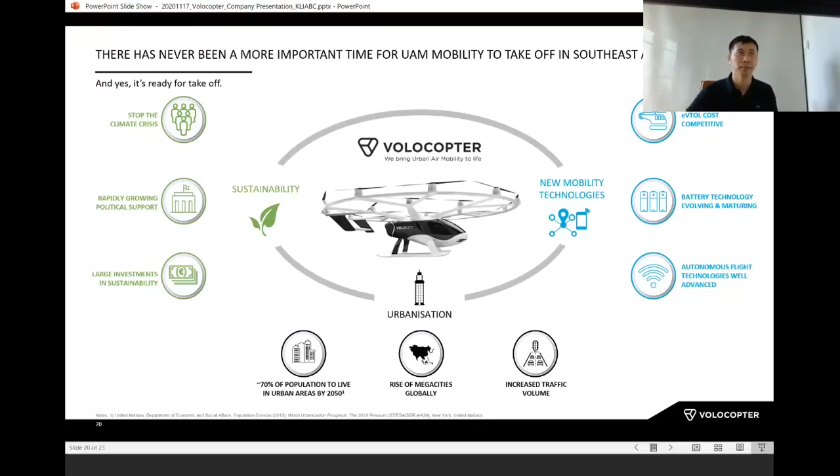Thank you, Mr. Honshu. Really interesting because VTOL and unmanned happens to be my personal area of interest as well. We were in fact in communication with Volocopter way back in 2016. So it's really fascinating to see how Volocopter has evolved. My question to you would be that we see so many air mobility solutions coming from traditional players like Airbus or even from car manufacturers like Hyundai. So what would keep Volocopter continuing as a strong player in urban air mobility?

Any thoughts on that? I would go back to what I mentioned before. When we started the company in 2011, it was really more of an experimental aircraft. And now the Volocity is really our fourth generation aircraft. As I mentioned before, it's designed for that inner-city, within-a-city travel. A 35-kilometer range is more than sufficient to cover practically all the cities in the world. When you design an aircraft, there are certain trade-offs you have to make, and we've optimized the aircraft for both fast certification as well as that inner-city use case.